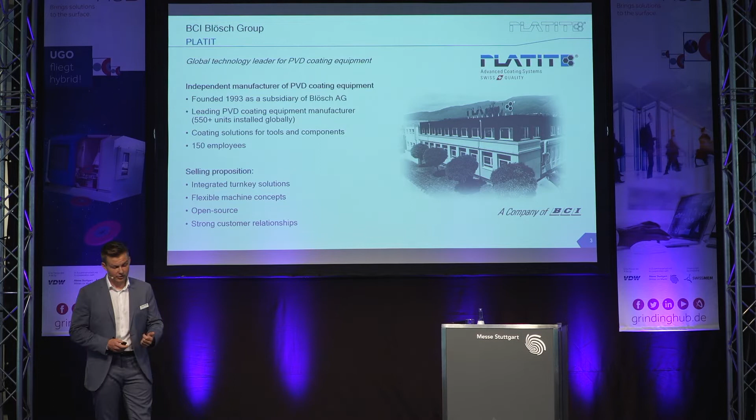Those 4 selling propositions that you see here will accompany us through the whole presentation. We will go through every one of these selling propositions because it's very easy for everyone to put something like that on a presentation like this and give a speech. But in the end, we have to prove what the real selling proposition is from a Platit side. And I would like to jump into that point right away. Keep in mind, integrated turnkey solutions is the first point, and I would like to prove that we are really living that at Platit right now.

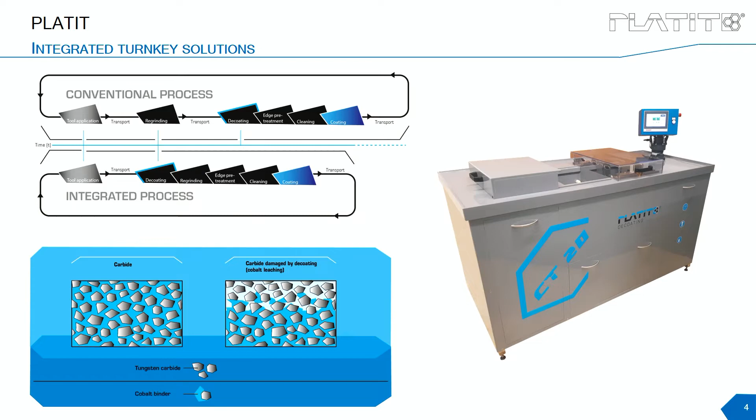So let's say you're a tool regrinder or a tool manufacturer and you're giving away your coating to a service provider, and you want to do it by yourself in the future. What we're doing here is an example of decoating or stripping your coating from a tool that you want to use again, for example. You have a major problem with cobalt leaching when it comes to stripping or decoating carbide tools. This cobalt leaching is a process that leads to less adhesion of the tool that you're using, and therefore it can break your tool in the end.

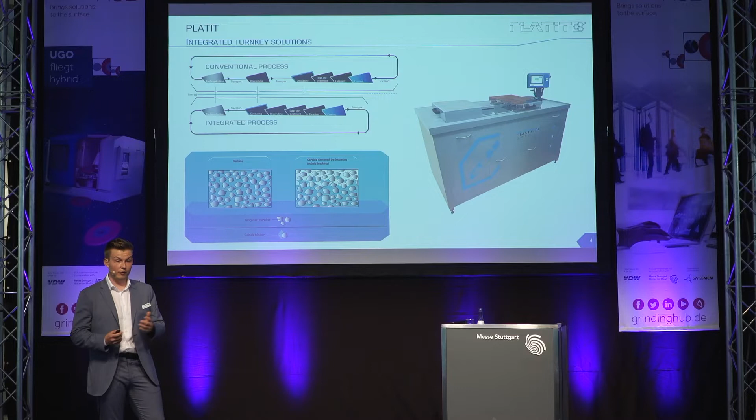What we're doing here is going from a conventional process with many, many different steps into an integrated process. We're using the decoating system only to go down to a titanium nitride layer, which is the adhesion layer of the PVD coating in that case, without attacking the basic substrate material. In doing that, we're not only integrating the decoating or stripping into your whole PVD coating process, we're also helping you to increase the lifetime of your tool or avoid failure of your tool. So this is the first one.

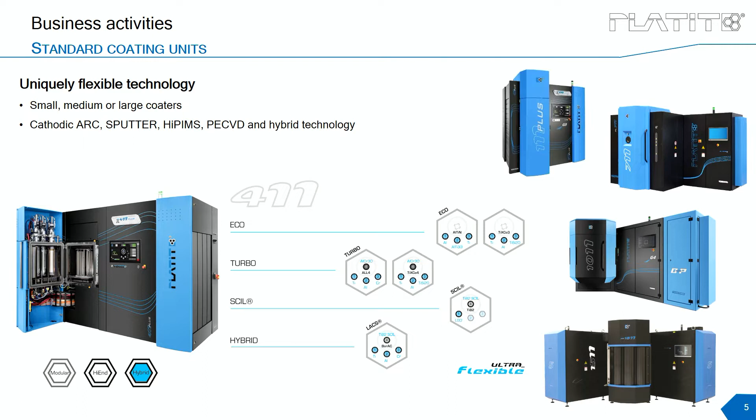The second selling proposition that we have is that we are providing the most flexible coating system in the world, or in general, that we provide flexible concepts for PVD coating systems. And the major example, beside all the different coating systems that we are offering in our standard portfolio, I would like to put some focus on the Pi 411. Because again, you are in the position of making a decision to probably insource your own PVD coating system into your company, and you would like to have the flexibility that if something happens in the future, the market is asking for a different application, for different coating or different technology, that you need something else.

What we're doing with the Pi 411 is we're offering our customers the opportunity to really start with an ECO version of the system, meaning you are just using cathodes inside the door, and these are all arc cathodes. Arc processes are used in like 90% of the tooling industry. So this is your starting point where you can really start your own PVD coating business.

Then if you want to be faster, for example if you have more tools, more quantity coming in per day, you need to be faster because your customers are asking you to. You can install another central cathode in the middle of the chamber. You cannot see it here due to the perspective of the picture, but this gives you the opportunity to have a faster coating process in the end.

Or you want to do components, or you want to use sputtering technology inside your coating system. Instead of the arc cathode in the middle, the central cathode, you can use a SCIL cathode. And in the end, you can also combine arc process and sputtering processes in the hybrid model version of that PVD coating system.

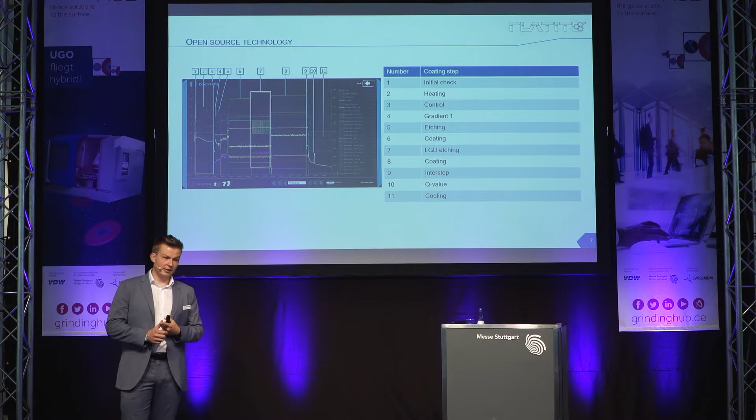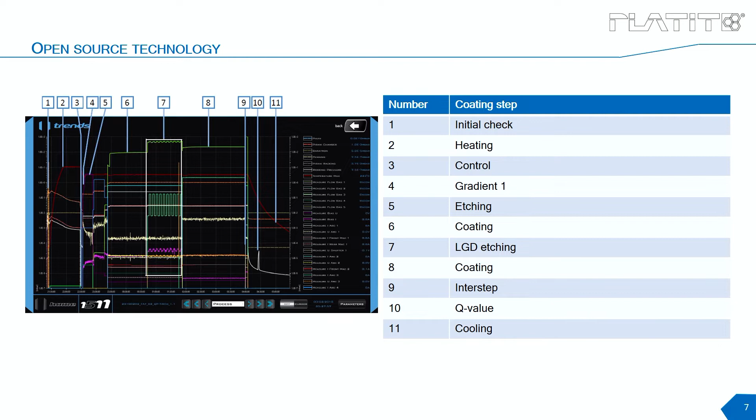The third selling proposition that we have is open source technology. What you see here is the overview of a coating process, this is called a trace file. So with our machines, as long as you have the know-how, you can really dig deep into the different coating processes and do your own research even.

So this is really open for everyone. You don't have to use that, but you still have the opportunity to. And this is very important for someone who is in the business for, let's say, 5 or 10 years, who wants to be really, really independent and develop something by himself.

Just for everyone who is not calculating in Swiss francs, euro and Swiss francs currently is 1-to-1, so it's pretty easy, you don't have to take out your calculator.

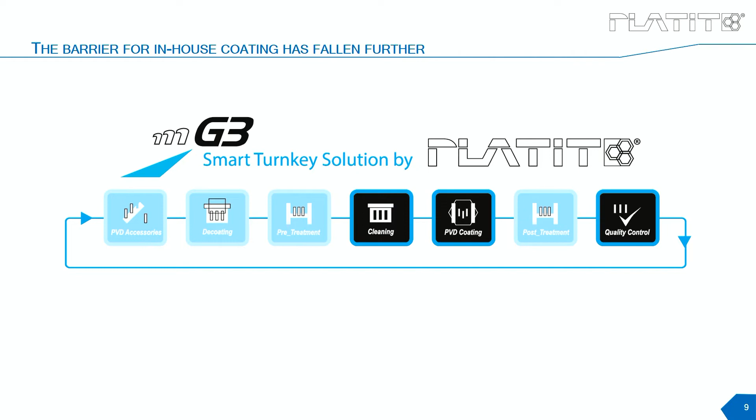How are we doing that? I would like to go into the very details of that message. What you can do at Platit is choose the whole range from pre-treatment, cleaning, to the latest PVD accessories like quality management, for example. This is not a problem. But if you want to go down to that level here, we need to have a starting point. And therefore, we stripped down that whole turnkey solution package to 3 major points.

For us, the most important points. The PVD coating system, of course, is the central part of every coating center, right? But without great cleaning, you can have the best PVD coating system in the world and it will not work, because you will basically have no adhesion to your tool when you use the PVD coating. And then in the end, your customers are asking you to secure a certain quality level.

So this is why we are including that as well here. So how does that look? This is the machine, which is the central part of the smart turnkey solution that we are offering, that helps you enter the PVD coating business by yourself in a very, very easy way.

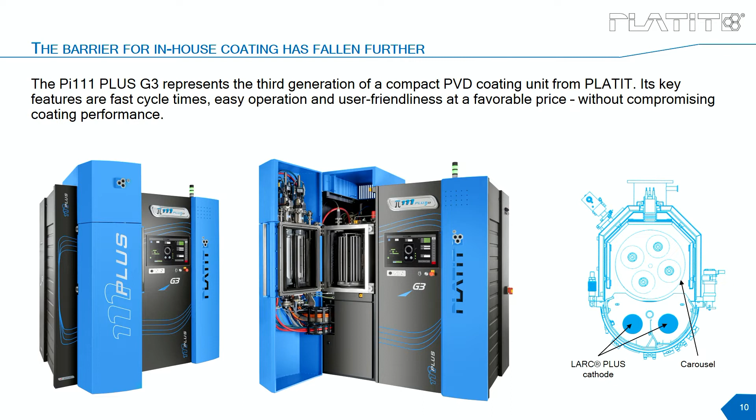We're working with 2 cathodes here, as you can see. So it's the same as the Pi 411, but a little bit taken down to the very basics that you need. This machine, and this is also very important for us, offers you a very high quality, which is comparable to the major players in Germany, in Europe, and the world in the job coating business.

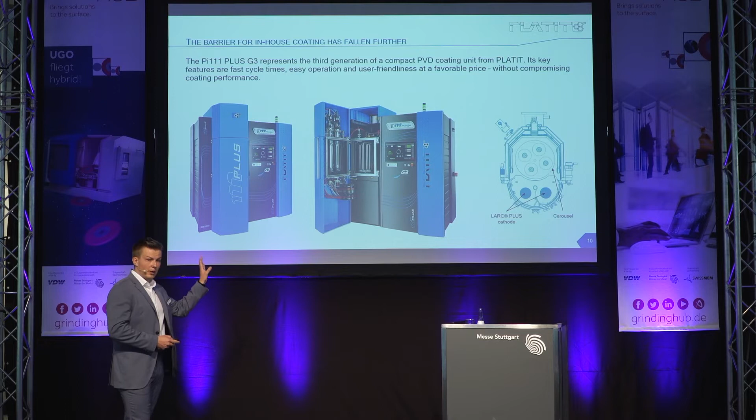You can do all the coatings with those 2 cathodes, starting from a titanium nitride, going up to an aluminum chromium nitride. And even if you want to mix more than 2 materials, more than aluminum and chromium, you can still have an alloy target, which could be like titanium silicon. So also titanium, aluminum, silicon is possible with that machine. This is the central part of this smart turnkey solution.

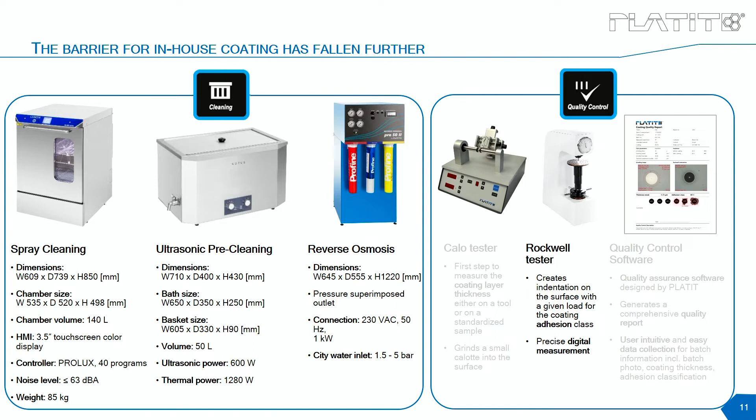And it's added up by a very comprehensive cleaning system. There's a spray cleaning, there's an ultrasonic pre-cleaning, and there's also a quality package which starts with a Rockwell tester. We are using that Rockwell tester to show our customers that we have a certain adhesion class, that your coating has a good adhesion level towards your substrate, and that if there is a failure, it's not based on adhesion. Of course, beside the Rockwell tester, you can also go for a Calo tester to have an in-depth analysis.

You can have your own quality control software that we are providing, that helps you provide really detailed reports to your customers. But again, if we talk about these 125,000 euro or Swiss francs, and you would like to do it by yourself, this is really the starting point, offering you everything that you need from the very basics with a very high quality level towards your customers.

The calculation that we made behind all this is this one. So what we were comparing, in the first 3 lines, you can see here, job coating expenses, and then also salaries for logistics and processing, which will add up to your total job coating expenses. Because even if you ship away tools, if you send them to someone to coat them for you, you still need an employee to take care of the shipping, the documents, and so on. So this is what many, many people underestimate.

And what we are taking into consideration here from our side is leasing, space rent, salaries, even maintenance. So we really put everything in there, because it makes no sense for us to give you a message like that, and then in the end the calculation is not working, right? So the reason for this table, why we are showing it in a very, very detailed way, is that we want you to understand that we really made our homework here and made a very comprehensive calculation.

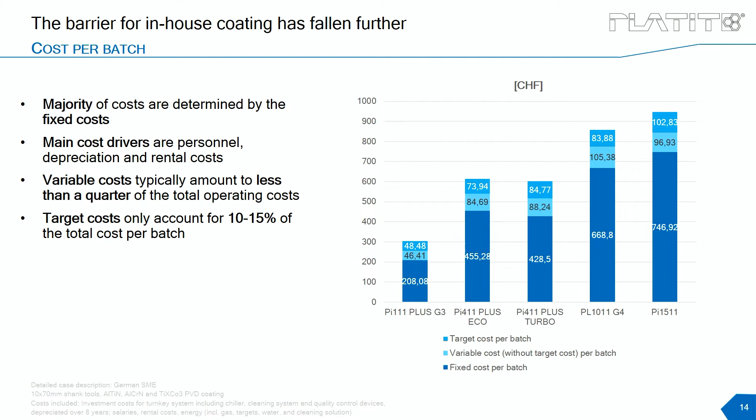Let's take a look at the cost, because this is also a frequently asked question: what is the cost of one PVD coating batch, and how does it differentiate between fixed and variable cost? As you can see, the major part here is the fixed cost - this is like depreciation, for example, and your personnel cost. The variable costs are really, really low. This is why job coating providers also run half-full batches - because if they only cover the variable cost for that batch, they still make money, so this is not a problem.

Target cost is also a point that everyone is always asking about - how high are the target costs? This should not be your major focus, because target costs make only one-eighth of the total cost you have in running a PVD coating system. The point where you should focus is really the fixed cost - this is where you can generate added value for yourself by bringing those down.

When you use a PVD coating system, it comes to certain scaling effects. When you take a look at job coating providers, they're using big coating systems, because with a higher number of tools that you put into a large chamber, the cost per tool goes down - it's not proportionally growing with the cost you have and the number of tools. This is why with an increasing chamber size, your cost per tool goes down.

I'd like to add one point here. What you see here is the Pi 411 and the Pi 411 Plus Turbo. The ECO version is the one with just the cathodes in the door. The Turbo version is the one with a central cathode to speed up the process. The investment for the Turbo version is higher compared to the ECO version, as you can see in the picture. But as you can run one more batch per day, at least depending on the tools that you have, the total cost per batch ends up being lower.

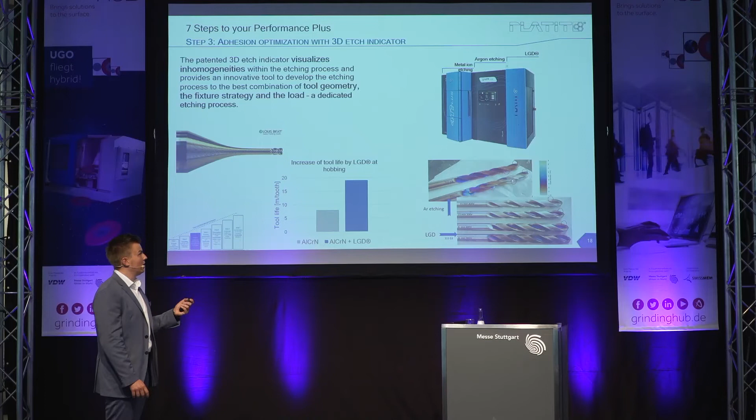One part of a PVD coating process is the etching. For those who don't know, etching in the PVD coating process is a step where you prepare the tool surface for coating so you have very good adhesion to the substrate. There are different possibilities to do etching in the PVD coating chamber: metal ion etching, argon etching, and LGD. This last one is a patented version by Platit, but we won't talk about the details of the technology now.

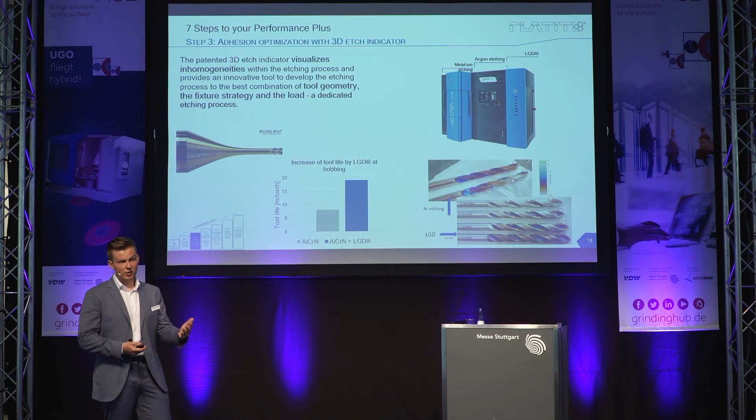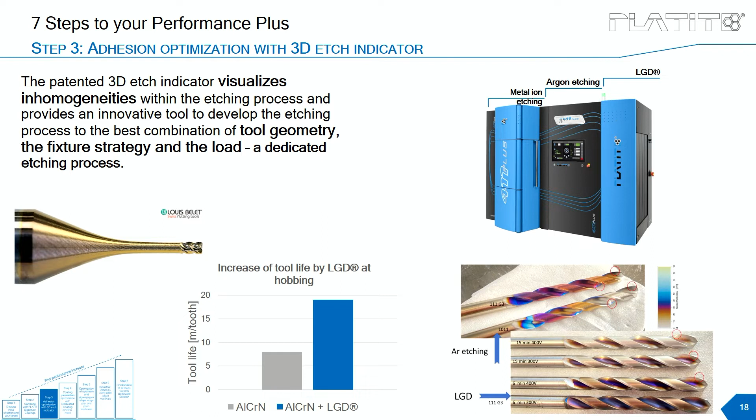What I'm saying is that if you compare a standard aluminum chromium coating, or standard PVD coating, with an optimized version where you really optimize the etching process towards the application and the tool that you have, you can add value with the same coating, just with a comprehensive etching strategy. This is what we're doing here with our 3D etch indicator.

The second point is flexibility. Everyone wants to be flexible but wants a very good solution at the same time. What we are doing, and I'll give you the example of the 411 here, is providing one installation with four different cathodes: titanium, aluminum, chromium, and in the middle a TiB2 cathode. With these 4 cathodes, without changing anything in the system, you have 8 combinations that you can use.

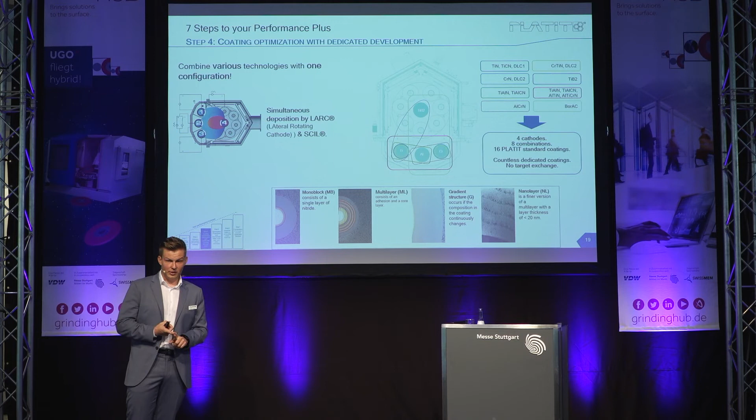You can have 16 standard coatings that you can use without making any hardware change in the PVD coating system. And with all of that, you can go from a monoblock layer, a very simple PVD coating, up to a nano layer with many different materials.

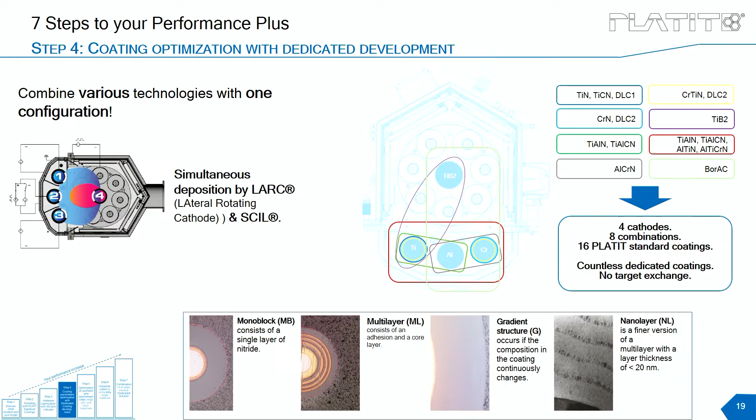These are steps 3 and 4. What we are doing is further optimization in terms of getting you a standard process, and in the end we are combining all of those. And if you remember the selling propositions we had, the last one was strong customer relationships, and I would like to talk about that now.

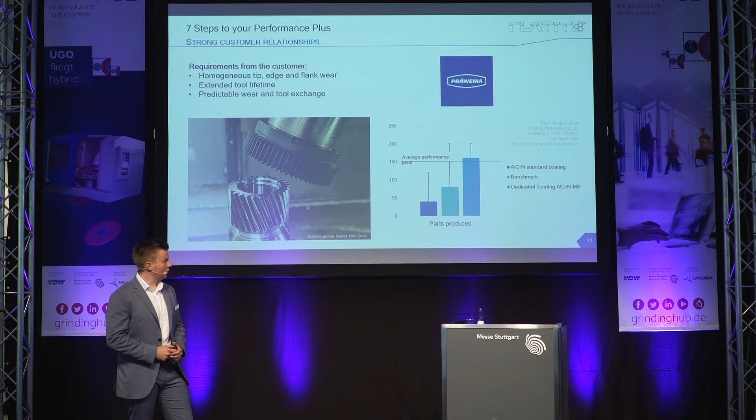This is the example from company Präwema. I think for some people here this company is well known in the tooling industry. They were using a standard aluminum chromium nitride coating for their shaper cutter tools. The benchmark level we had was 150 parts produced. We went through all these steps in our R&D together with the customer and came up with a solution that went beyond that average performance level.

So this is really the story of us integrating the coating system together with a customer into his facility.

The second story I'd like to share, and I'm very happy he's in the audience right now, is the story of company DCC. This is a job coating provider in Germany, started by one person who was basically an agent, a distributor. He worked every day with 5 different companies in the job coating field, carrying tools in his car and driving them to his customers. He made up a certain revenue, but then had a major challenge because he took the best coatings from different major players in the job coating industry and wanted to integrate everything into his own company. This had to be done very fast, otherwise he would have lost his customers and what he built up over years.

We managed, together with him, to go through a fast-track insourcing process so that within a very short period of time he was able to bring all these coatings he used to get from different providers in Germany into his own company, and build up a company from being a sales agent to a real production company. This is the story of DCC.